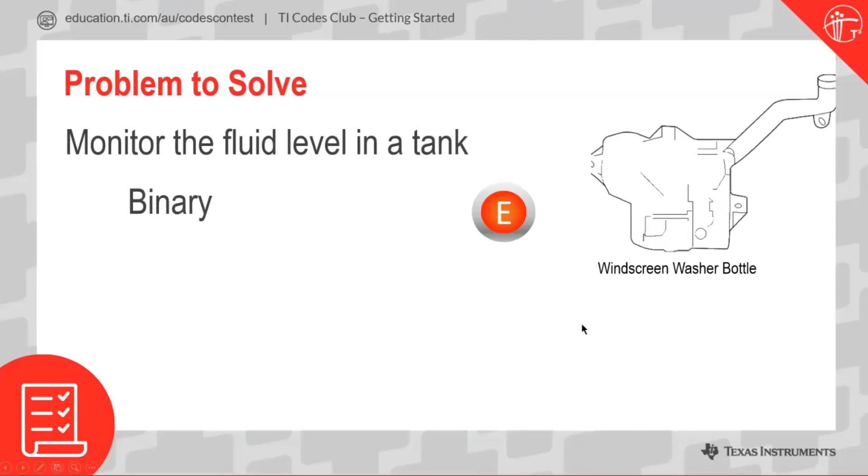But that's not always the case. Not all fluid tank monitoring gives us just an empty or full indication. For example, we can have what's called continuous monitoring. In the case of, say, the fuel gauge, it would be pretty disastrous if all it did was tell you it's empty. Imagine you're driving along the highway and then all of a sudden it goes beep, which means you just ran out of fuel. So obviously a fuel gauge, we need some sort of a monitor to tell us whether it's half full, quarter full, or indeed about to be empty.

And I'm sure there's been a few people ignore that gauge from time to time and possibly run out of fuel somewhere. I've actually, believe it or not, run out as I've pulled into the service station. It literally ran out and I had to push the last 2 or 3 meters because it went up the hill to go into the servo. Yeah, I just shared that. That's pretty silly, wasn't it?

I don't think you'd be on your own there, Peter. No, that's it. So just on the fuel gauge though, I think an interesting one there. Most cars actually have an example of both of those monitors that you're talking about, both binary and continuous. They do, when the red light comes on. Beep sound when you get to like 100 kilometers, that one? Yeah. Oh, that and the red light that says you're just about out. Yeah, so it is an example of both. Yeah, yeah, that's right. Yeah, I'd forgotten about that. And so, well, I'll call it some of the older cars. The little fuel gauge lights up, doesn't it? And the little E starts to flash at you or something. But you're right, it does.

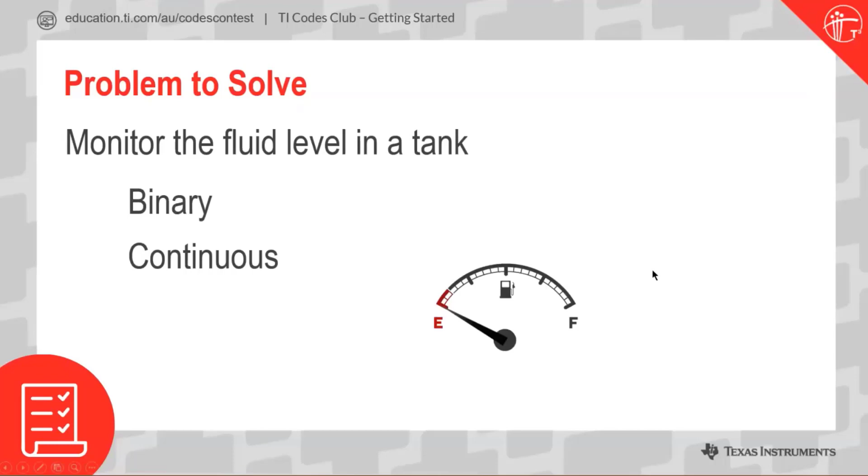It's also what we call normally open. Now, open we refer to in terms of an electric circuit, so open means an open switch, is generally how we refer to that. In this case, it's kind of ambiguous because the valve is closed to water when this thing is not activated, and it opens when it is. So it's kind of an awkward one, isn't it?

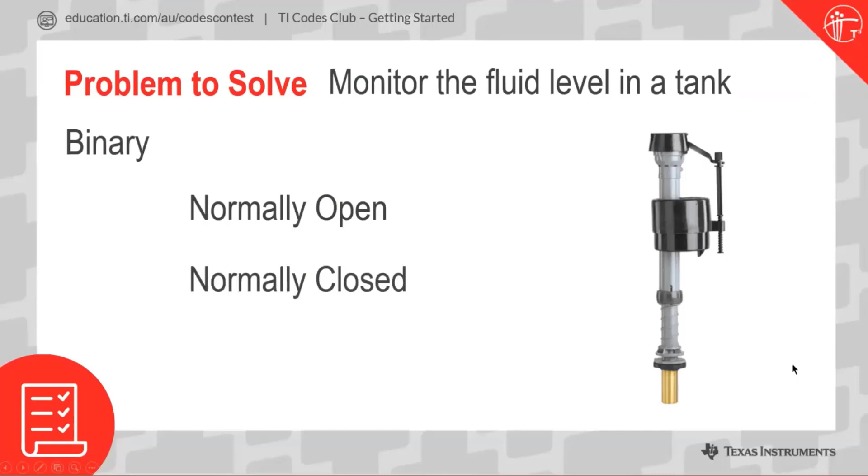So we've got normally open and normally closed, and you'll find most mechanical switches will also have the same sort of thing on them. But this is one of the most common sort of water monitoring systems that is in any household, at least one you would hope in every household.

Now, this one is from a water washer bottle, my original example. The component is the actual component from a BMW, and if you look closely at the screen, it actually tells you BMW on the part. So there's this small float, this white plastic part is what we call a float, and then it literally, as its name says, floats when there's fluid in the washer bottle.

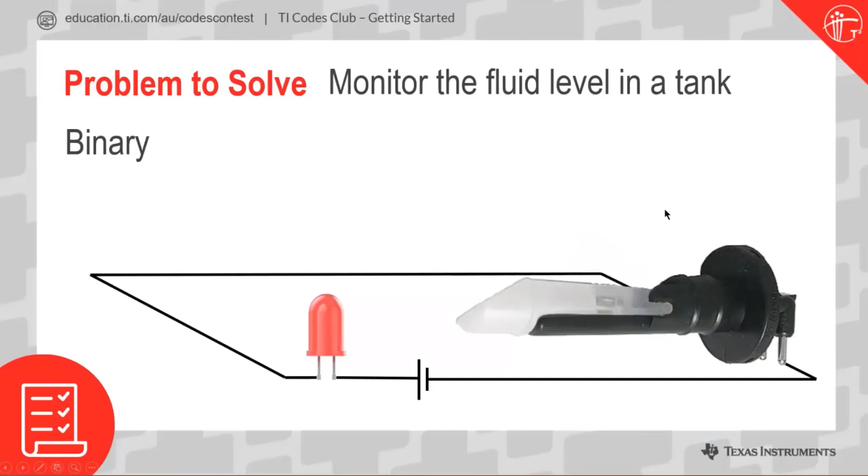And you can see it's got two little electrodes. They're not actually in the water, this gets sealed in the actual tank. And then if the water runs out, that white bit drops and it levers into a switch on the outside here that closes the circuit and puts a little light up on your dashboard to say that the water has run out and you need to replenish it. Unlike our fuel gauge, which would be continuous, this one is binary. It's either off or it's on. It's a 1 or it's a naught.

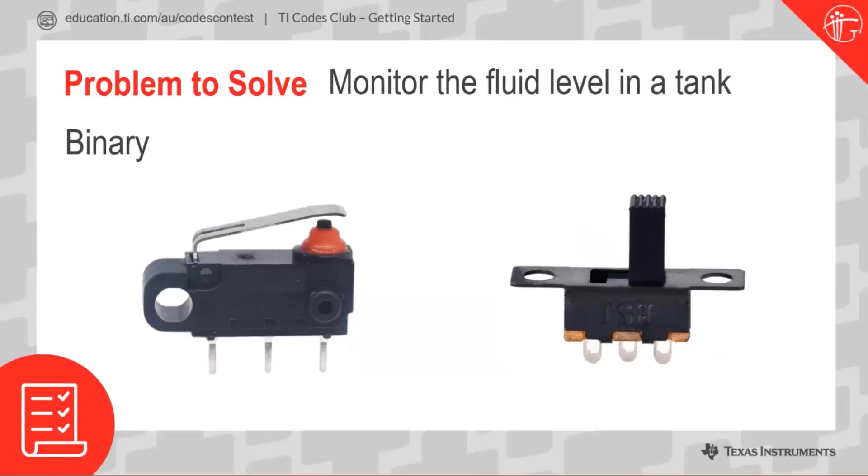So in the circuit we're talking about, say monitoring fluid in a bottle, you'd probably want to use the one on the left and ditch the one on the right. The reason being, think of this practically - if the water washer bottle is empty and you top it up, you'd expect the red warning light to switch off. With the switch on the right, you'd also have to find the switch and reset it, so it's not really the type we want for this case.

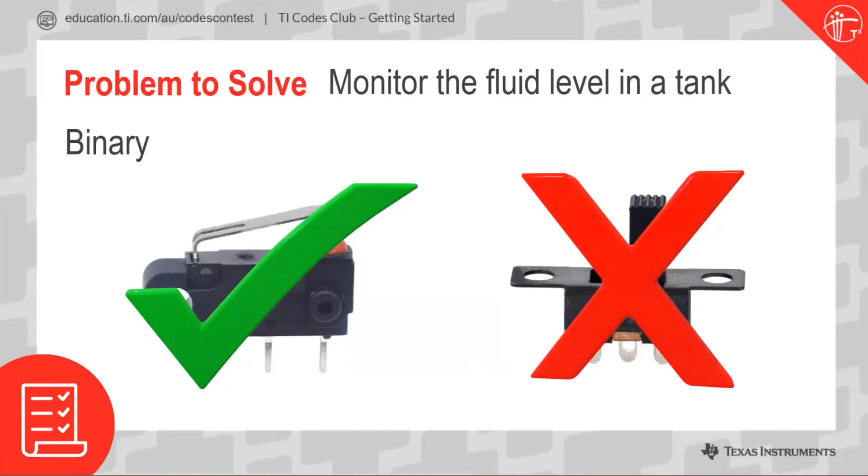We want one that's going to reset, so this metal lever is spring loaded and will bounce back into position once the circuit or condition has gone away - that is, our water is now being topped up.

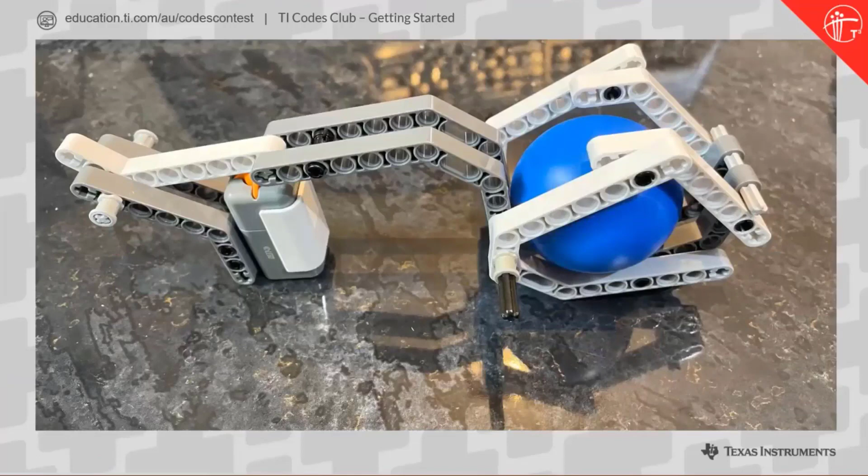Now I did make a little physical model. I've got a webcam here, but it's more for my next model that comes up later. This one is using some Lego parts - very primitive, I'm sure students will make something a lot more sophisticated, but you can see you can gather resources you may have sitting around the house. It's probably a bit weird that I've got all this Lego lying around, but that's the way I am. There's a switch over here - I've used the actual Lego switch because there's wires underneath that I can access.

It's just going to connect two wires together, that's all it does. This little orange bit here is spring loaded, so as that goes up, the fulcrum is down on the left here, so this arm will rotate and release the switch. This plastic hollow ball will float - if this was sitting in water, not the switch obviously, this end has to be sitting in the water, very important to know that. As the name describes, it floats to the surface, so it physically pushes the arm up and releases the switch.

Or when the water level drops, the ball sits on the surface of the water and then pushes that pin in when it gets empty.

You probably remember, Brian, like I do, the old days of carburetors in car engines. Absolutely, yeah, I've messed with a few of these things over the years - certainly the toilet system, where I've often had to replace valves on that. And the old thing with a car carby was that if you ran out of fuel, to get it going again you'd just throw a little bit of fuel in the carby once you filled the tank up. That's it, because the float was empty - the little floating ball, or tank, sits inside the carburetor and is supposed to hold fluid in there. Sometimes the little needle in there, the valve that allowed fuel to come out, would get stuck, so that was another thing you had to replace. But nowadays we have fuel injection - though those things still existed, a very common setup.

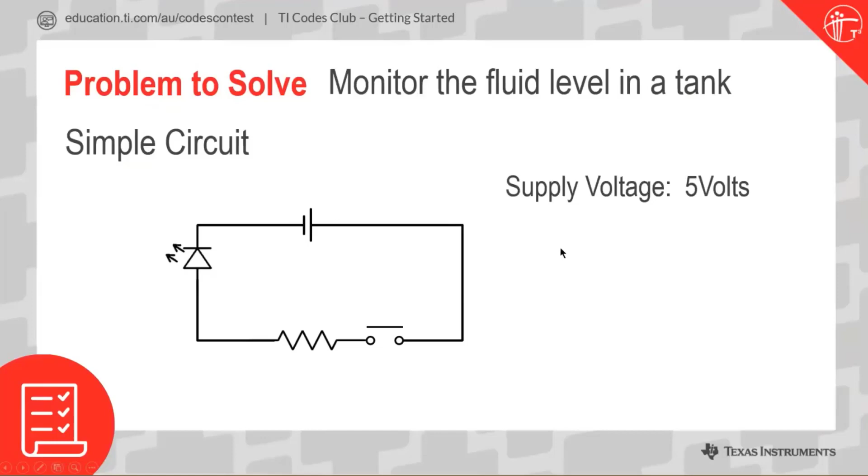In the case of the TI Innovator Hub, your supply voltage is about 5 volts. You might use different circuitry other than the Innovator Hub, depending on what part of it you're doing. But you might as well, because it's got a nice little 5-volt supply in there that we can utilize.

Diodes tend to run about 20 milliamps. That's a very, very small amount of current, and it's important that you know some of these things once you start to build the circuits.

And we need to know this handy little law here called Ohm's law. It's very simple: voltage equals current times resistance. So I want to work out what resistance I need. I've got 5 volts, that's the V. I've got a current of 20 milliamps, so we need to know our scientific notation. That'd be 20 times 10 to the minus 3. We transpose it to make R the subject, and we can work out resistance.

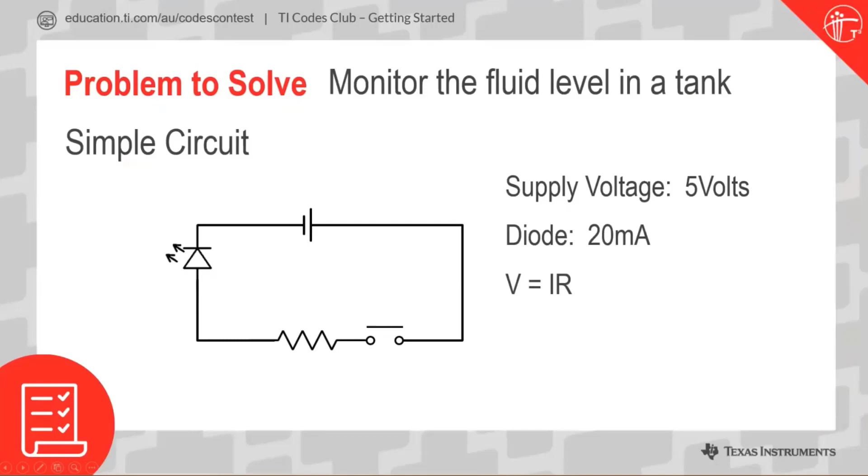So let's do an example. Now, I've drawn the circuit a little bit different just to make it easier to follow. So we've got 5 volts over here, 0 volts at the ground, as we call it. And here's our color chart.

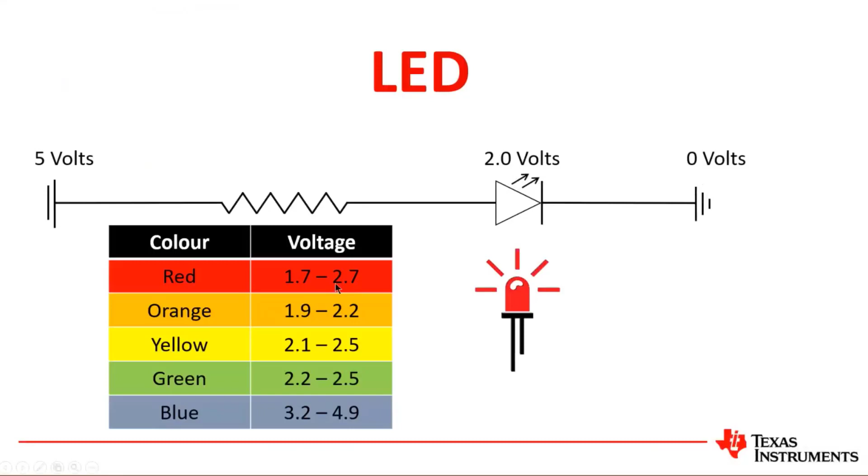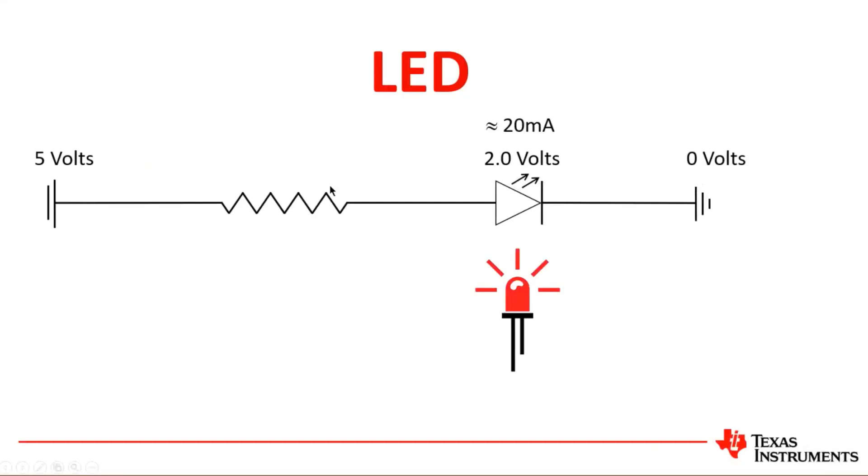So the red diode that I was using, about 2 volts, but you could change it to a different colored LED, 20 milliamps. And Kirchhoff's law says we add the voltages up. So I've got 2 volts here, which means I must have 3 at the actual resistor. And it's a series circuit, so it's still 20 milliamps.

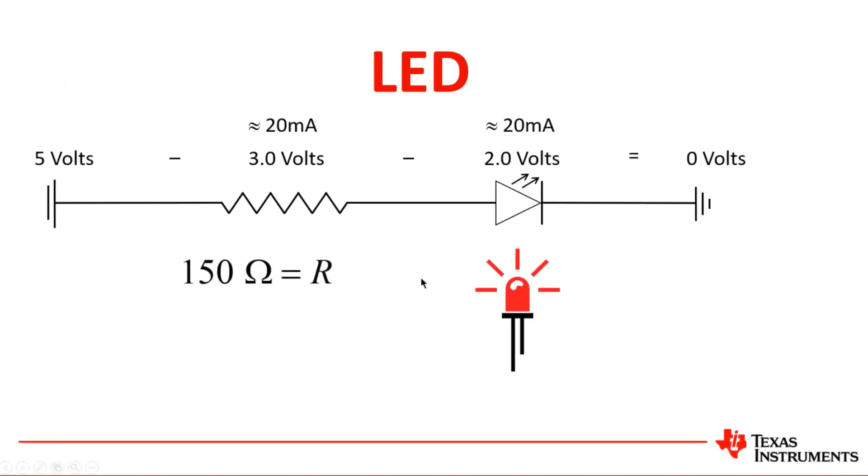As I said before, we rearrange the formula to make R the subject. 3 divided by 0.02, I've done the arithmetic, it's 150. And then we can wire up the circuit.

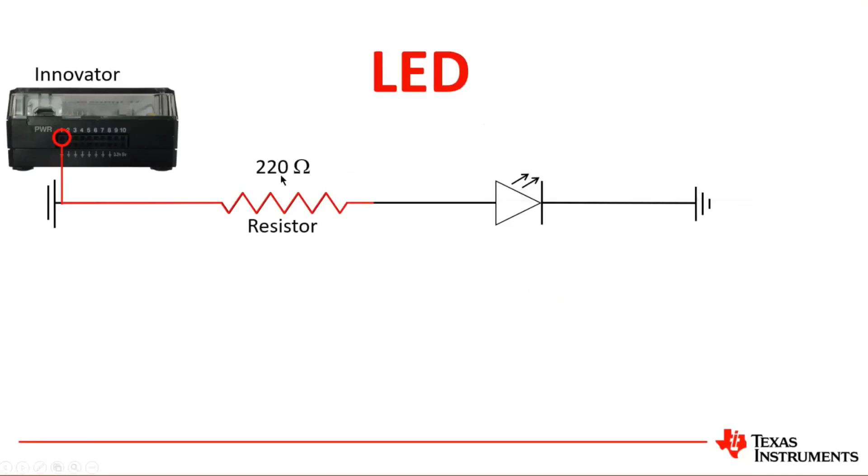And when it comes to physically wiring it up, you might not get 150 ohms, so I might use a 220. That just means our diode won't be quite as bright, but no big deal, it's still going to be bright enough to see. And here's the color coding for our resistor.

There you go, there it is. So they have these colored bands in there. And you can download these from the internet, look it up. That's basically what I've done, is just looked up these color coding bands. 220, red equals 2, so 220 times 10 to the 0.

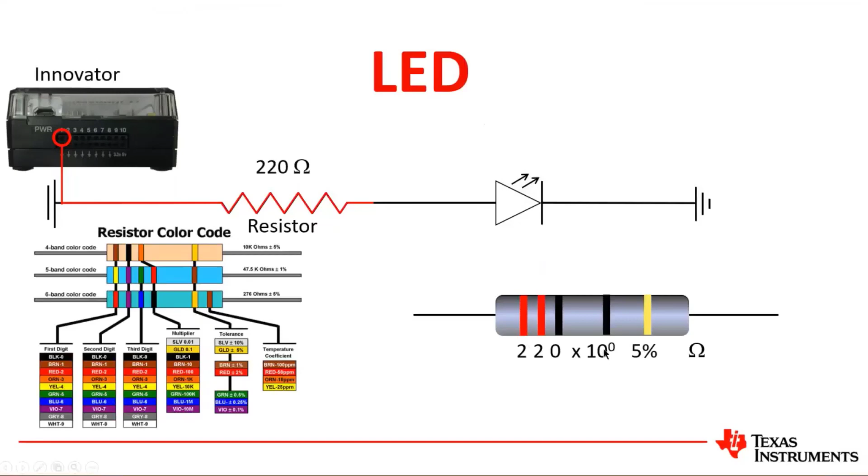5% is a gold band. So I've got my resistor plugged in there.

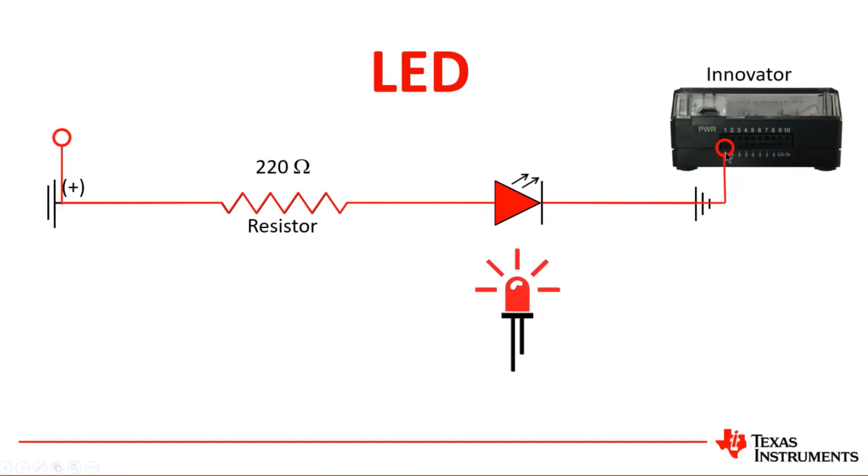And my diode will come on as long as this circuit is complete, which means I need to put the other end. So I've got one end going to the positive part of the breadboard, and then the other end will go to the negative part of the TI Innovator Hub's breadboard. You'll see it's got that little earth symbol down the bottom.

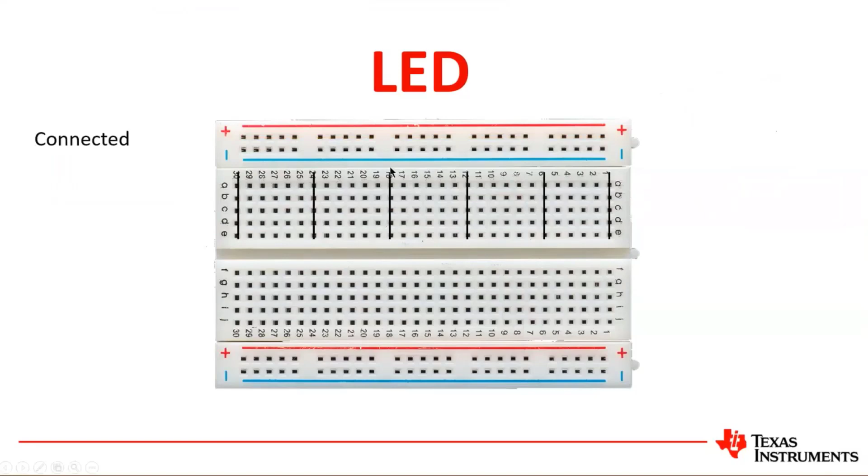The actual breadboard that comes with it, the positive rail or supply rail, that's all those little dots across the top, and then the negative one just below it. And you'll see you've got another branch down the bottom, which is exactly the same. And for all the pins in the middle, they're connected that way. You can see they've got numbers. So all the pins on 30, A, B, C, D, E are joined. And F, G, H, I and J are joined to one another, but E and F are not joined unless we do it.

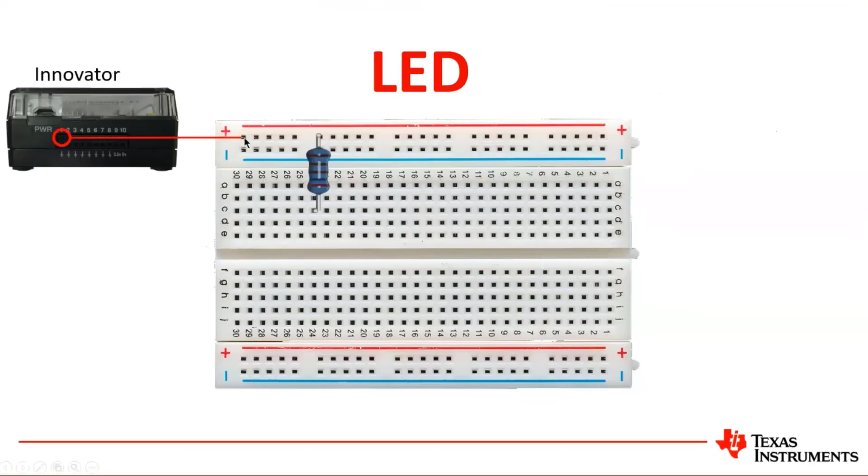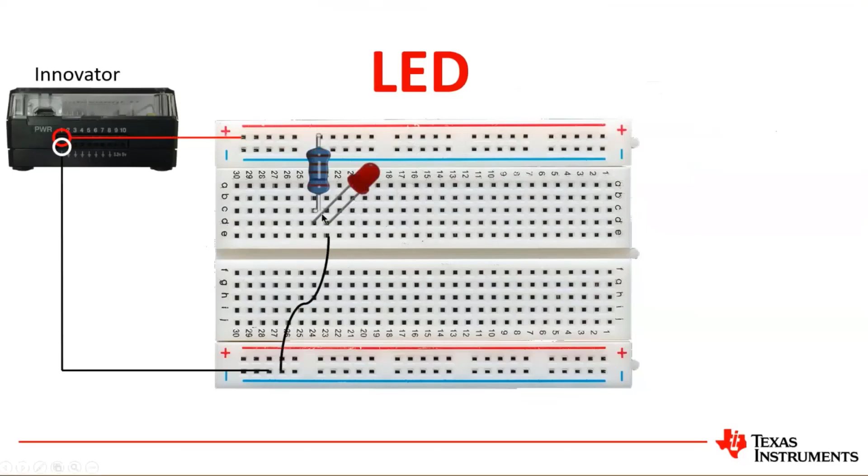So what do we do next? Well, we can run the positive lead into the positive supply rail, into a resistor, into our diode. The longest end, the larger end of the diode is the positive end. Positive numbers are bigger than negative. And the negative terminal just comes back to the TI Innovator Hub. So that's your basic circuit on how to wire it up.

All right, where to next? Analog or continuous ultrasonic ranger is another sensor that we can use. So we've looked at the binary, a switch just coming on or off. Now we'll have a look at this idea of a continuous or analog sensor.

Ultrasonic range is one - believe it or not, some cars now have ultrasonic sensors in their tanks. So they're using sound to detect how much fluid is in the tank. That's pretty cool, and it's great that students in this contest get to actually play with some of these building block technologies.

How would you use an ultrasonic sensor to gauge the height of a liquid? Can you design something here? Here's a question for you - whereabouts, other than some fancy cars that have them in the tanks, would you also see an ultrasonic sensor on a car? I'm thinking these reverse sensors.

Yep, so if you have a look on the bumper bar, some cars have them on the front as well - I used to refer to them as reverse sensors. My son has a car that has it on the front and the back, and some cars have them on the side too. They're positioned all around the vehicle so they know when something is near in any direction. You'll see a lot of them in the rear bumper bar, as you rightly point out. They were originally called reverse sensors, but now they're becoming all over the car.

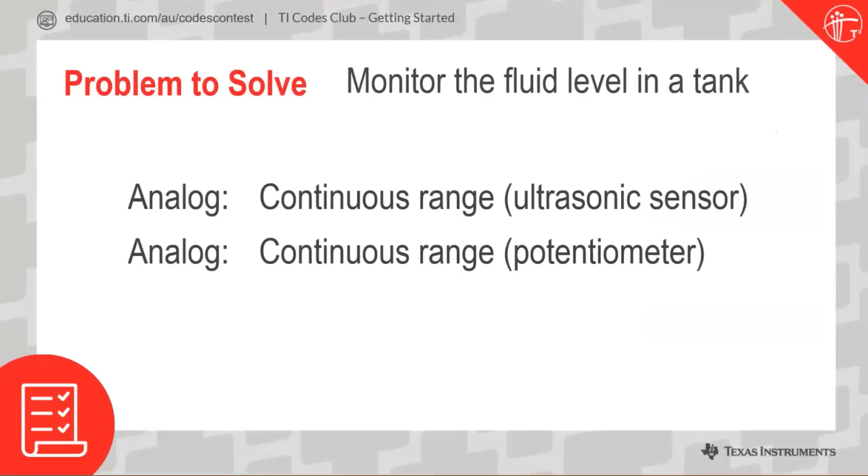It's just one of those ultrasonic sensors that says, okay, my field of view just got blocked - that means there must be something off to your right. So it's a lovely little example of a warning light that pops on when the sensor's being changed.

Really simple - so it's ultrasonic, you won't hear it. That's the whole idea of why it's called ultrasonic: sonic meaning it's got sound, ultra meaning it's a frequency we don't hear. So just because you can't hear it when it's on, doesn't mean it's not working. You'll see one has a little T above it - that's a transmitter - and the other one, R, is the receiver. So the sound is transmitted or pumped out from here, and then received in the other one. If you were silly enough to put your finger over one of those, it will never receive the return signal.

Not that I'd necessarily encourage this, but here's an interesting question: if you have two identical cars reversing towards one another, could you actually trick them in some way? The sound pops out of my bumper bar and hits the receiver on your bumper bar - does your car know that's not the signal it sent? Are they actually encoded in some way? Are they on different frequencies or a set frequency? You'd think perhaps a single manufacturer may just be lazy and leave them all on the same frequency, in which case it could be an interesting test to see what happens - just be careful if you try it, in case it messes up the signal.

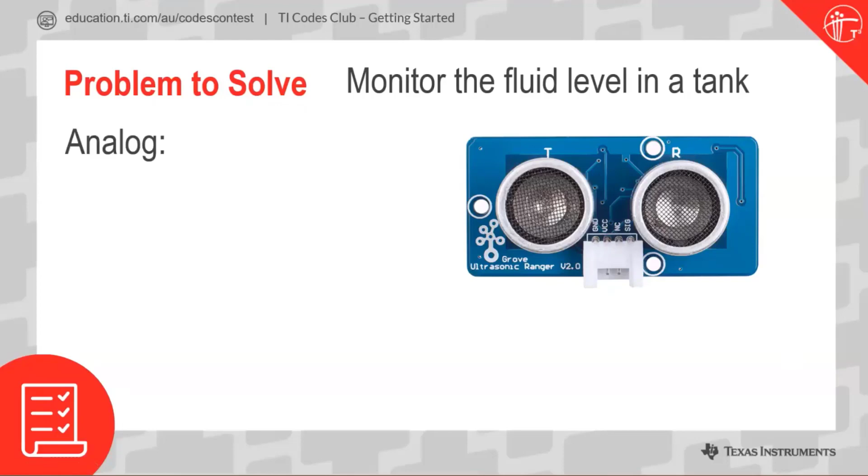Another spot you'll see them is the hand sanitizers at the supermarket - you put your hand in there and the spray is supposed to come down. That's a classic example of a sensor just detecting that some movement happened. It's actually the time it took for that sound wave to come out and reflect back that suddenly changed, so it then says, okay, I'll squirt some sanitizer onto your hands - assuming, of course, the bottle is full, because if it's not full, it's not going to squirt anything.

All right, now another one - this one is also an analog device, and it comes in the Innovator kit, the little STEM kit with all the small components in it. So I decided I would make one of those, or make a circuit or a physical model with one so you can see how it works. This one is essentially just a variable resistor.

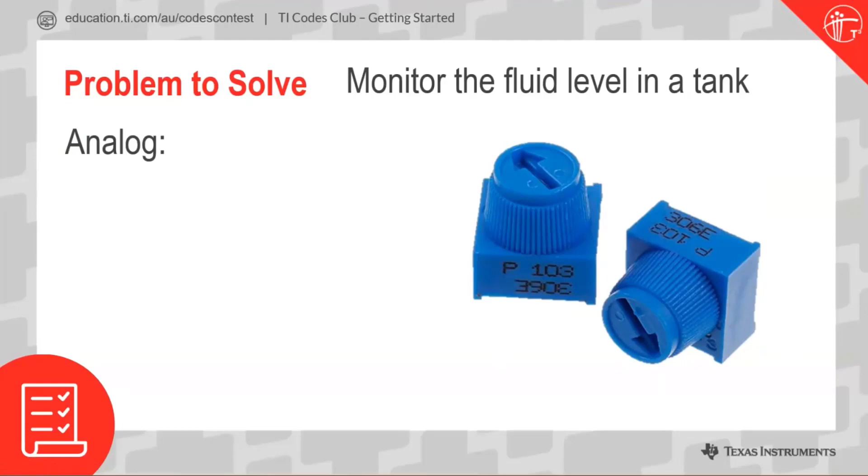Here's a little model I've made up and I'll just run through it. Then we'll test to see if my webcam will pick it up and my software will actually detect the change, so you can see what we mean by an analog sensor.

So in my program, I said I'm just going to supply a constant voltage output. I'll just use digital and switch it on. It's a really simple thing, just digital output, switch on. So it's supplying a low current 5 volts through this variable resistor.

Again, I've used my Lego — says something about me, I guess. I just used a hot glue gun to attach a Lego piece to the top of that variable resistor.

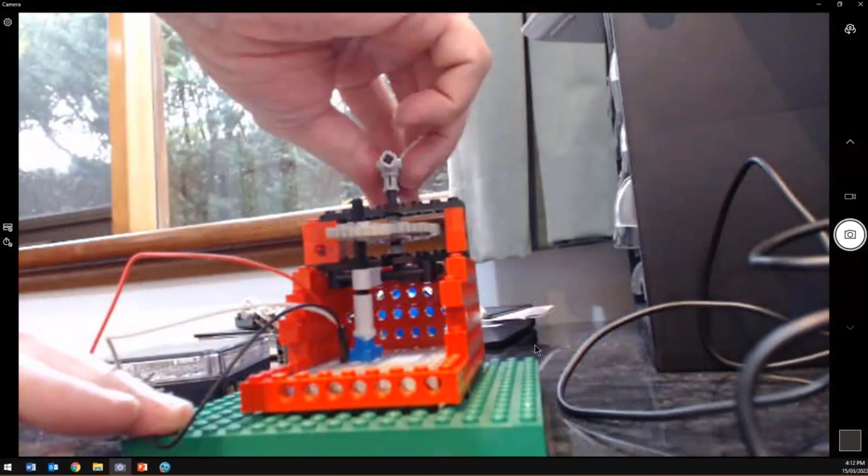So this little lever on the top, if I rotate that, it's actually glued to that variable resistor and it's rotating. If you look down the bottom here, you'll see as I rotate it, that's rotating the resistor. Now the TI Innovator Hub is reading that change — it's reading it as a different voltage because it's having to go through more or less resistance as that rotates.

So now let me swap across to show some code. This is the first time you've seen some code. In our later sessions, we're covering how to code, and you can choose whether you want BASIC or Python. We haven't covered that in this session on purpose, because that's coming up, and what we're looking at here is what's going to be covered in the last two sessions.

So this one, we're connecting digital out to breadboard port 1, putting a voltage out of breadboard 1. I've also connected an input, analog in, and that was connected to breadboard port 5.

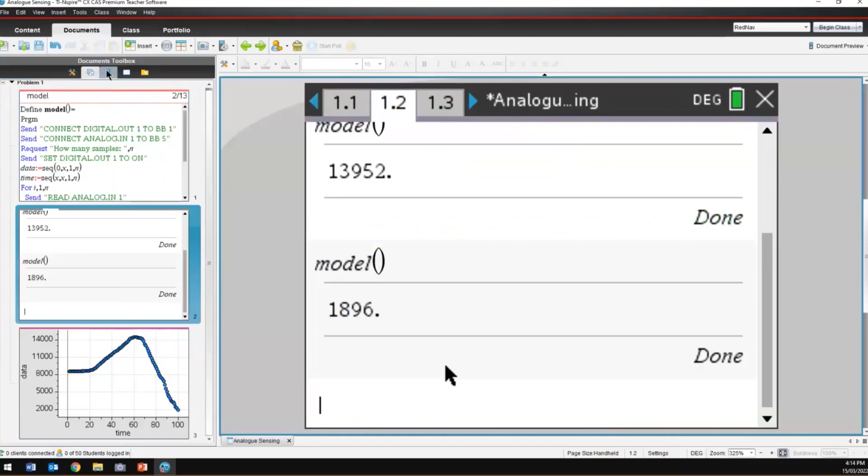And I said, let's just run a sample of 100 points or 200 points. So I've asked, how many would you like? And then it's going to store the data. Let's go into here. You can see in the background there, I've already run one before. Let's bring up the calculator. So the program's on page 1.1.

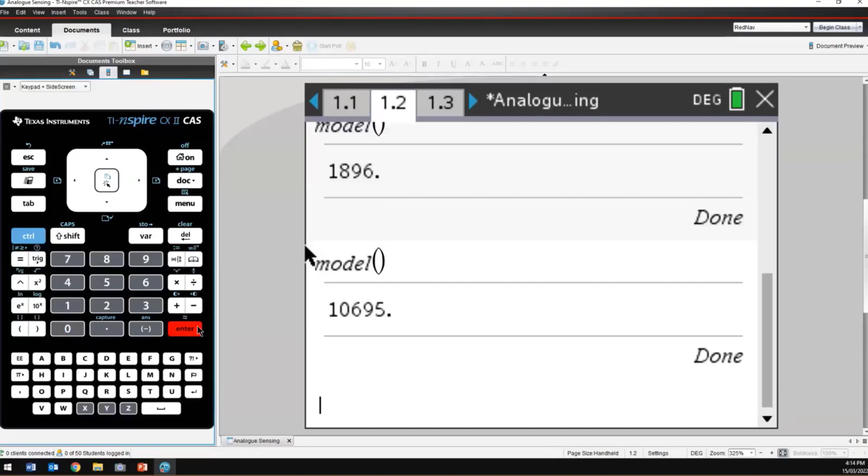On page 1.2, I can just go ahead and press enter. It says, how many samples would you like? I'm going to do 120. Now, it's not doing one every second, it's just however fast it's going to collect them. So then I'll click on OK, and you'll see I'm just rotating the arm now and see that the numbers are changing. That's fully to one side and then going back again, and that's all its samples. So that's what that looks like over here at 120 samples.

So you can see I rotated in one direction, stopped, and then rotated back the other direction. So this might be a full tank of fuel running down. It'd be nice if you could just do a lever nowadays, two dollars something a litre, and then empty, and now I'm filling back up again.

Now these numbers are meaningless at the moment, they're just measuring a degree of voltage. It's basically an analog to digital converter, so it's just assigning a number. So you would need to calibrate that. So if it was full at this voltage, then that would be some condition, and then you might say, if voltage less than this, or number less than this, then switch a light on or something like that.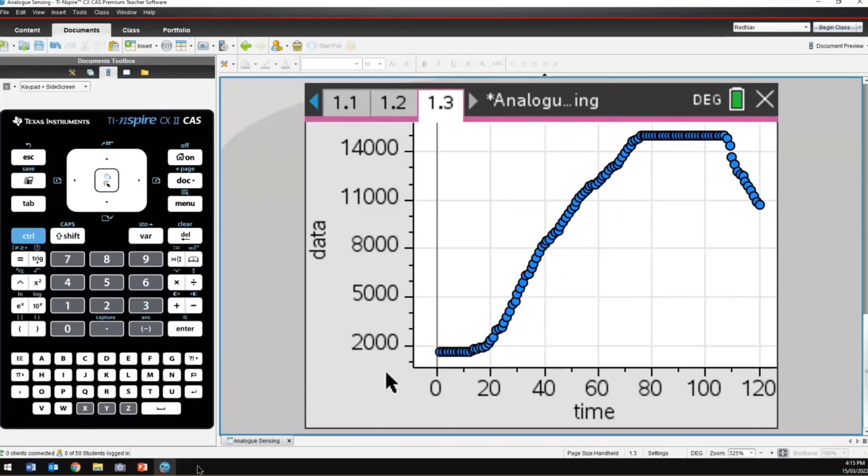All right, so that leaves us to what's coming up next, Brian.

So on Tuesday, I'm probably pinching your thunder here, am I? On Tuesday the 22nd of March, you get to choose your language, that would be BASIC or Python. And then on Tuesday the 29th, we have the inputs, a bit like the ultrasonic sensor or that variable resistor, and then selecting your hardware outputs. That is like whether you want lights, pumps, motors, those sorts of things, and how you connect them. So we're doing programming examples on the 22nd, inputs on the 29th, and outputs on the 5th.

And for those football enthusiasts, we've also got one on the 30th of March. Have we got any time for me to plug that, Brian? Yes, look, I know I'll be very keen to attend that one, Peter. I reckon you've certainly caught a big fish to help in the hosting of it. I like that. Yes, we have a guest appearance from a former AFL legend. A bit of a clue in there.